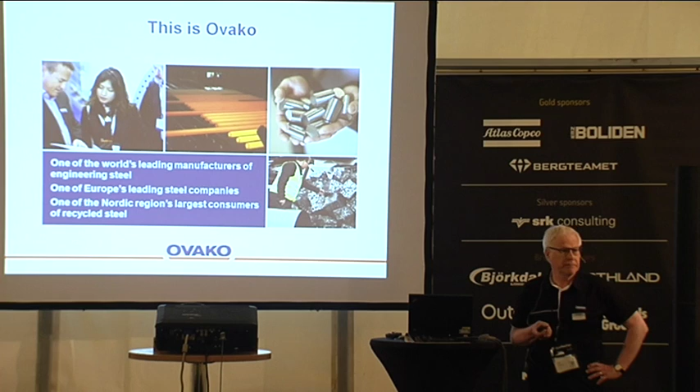Some words about our product palette. Most of the tonnage is produced as bars in different sizes and shapes. We also have profiles on the program. We do hot worked bars and cold worked bars. We also produce rings up to a size of 4 meters today.

Tubes, and of course what we'll be talking about today is the grinding media, as grinding balls, but also as grinding rods.

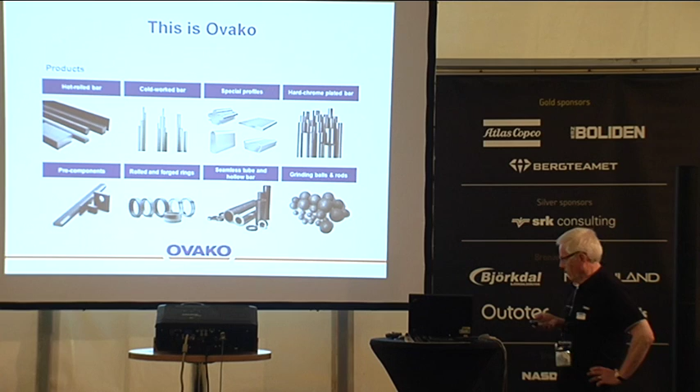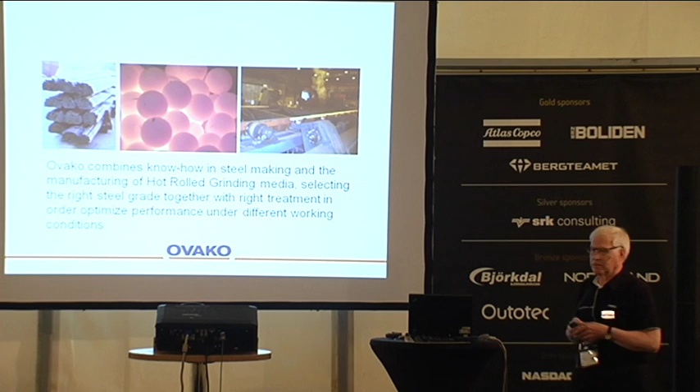What makes us special in this case is that we are probably one of the very few manufacturers of grinding media with their own steel mill production backing us up. From that we can choose the best optimized solution when it comes to steel making, forming, and treatment in order to optimize the performance under different working conditions during grinding.

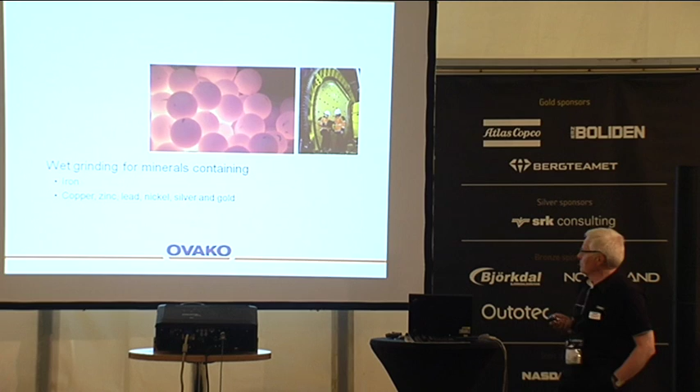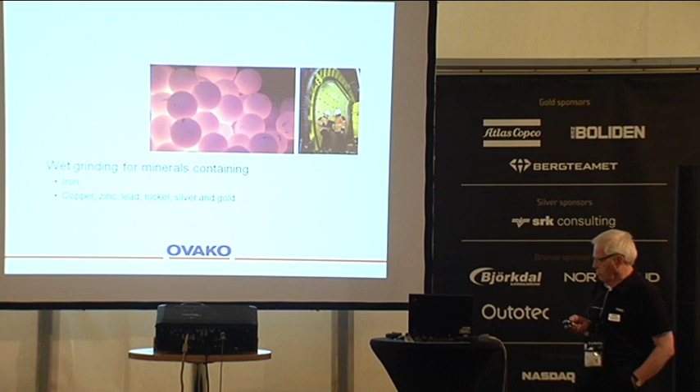Our focus area first hand is wet grinding, and it can be minerals containing iron, which is normally the oxidic mineral, copper, zinc, lead, silver and gold. It can also be grinding for the cement industry, mainly grinding sand and limestone, or it can be soft minerals like talc or graphite.

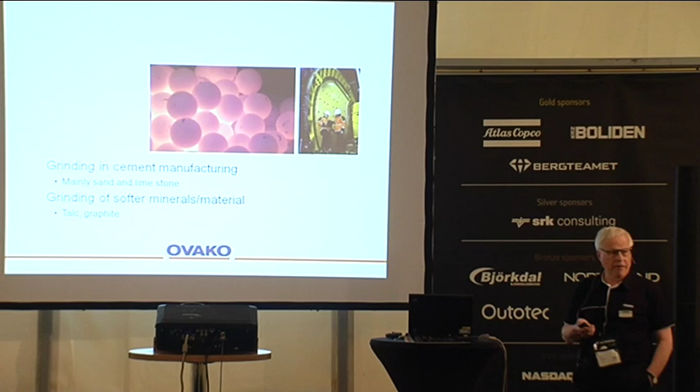We also supply for the recycling industry, which is in first hand taking care of slags from the metallurgical processes. It can also be glass that is recycled, or cemented carbide tools that are grinded.

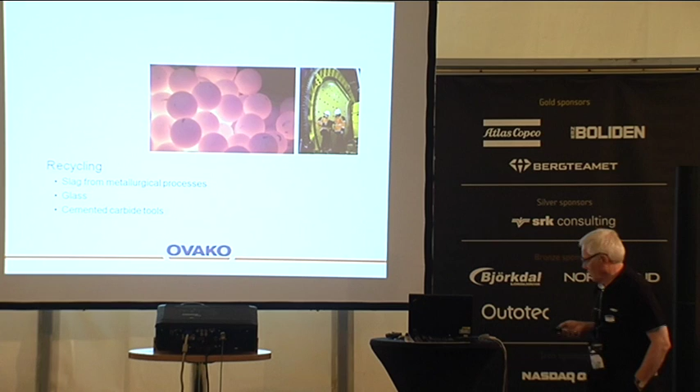In the grinding process, our customers are often focusing on the output, tons per hour, energy consumption, kilowatt hours per ton, or the wear of grinding media, grams per ton or grams per hour.

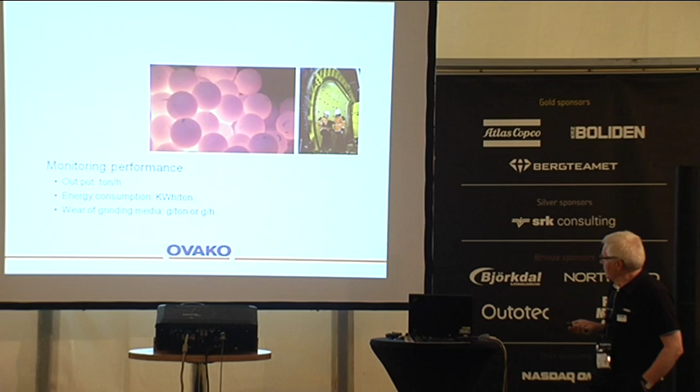For a given grinding ball or rod, the steel chemistry in combination with the microstructure are the dominant factors for controlling wear resistance.

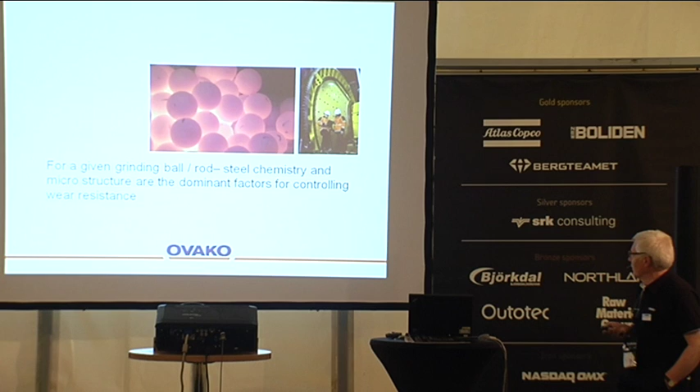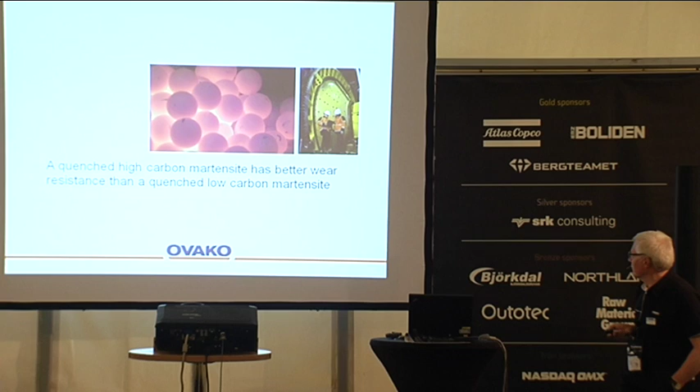A quenched high carbon martensite has better wear resistance than a low carbon martensite. Increasing hardness always leads to improved wear resistance, and that's the reason why we very much focus on alloys of steel with rather high carbon content.

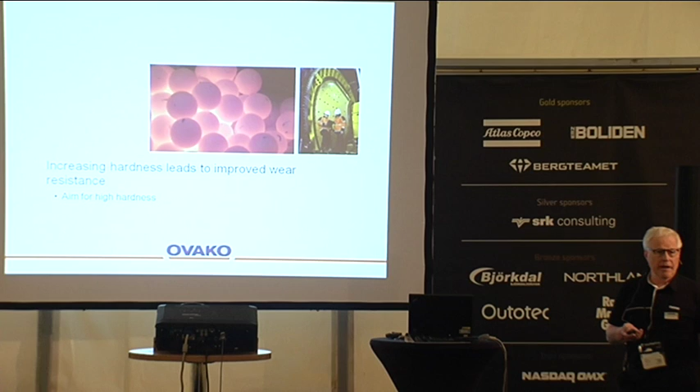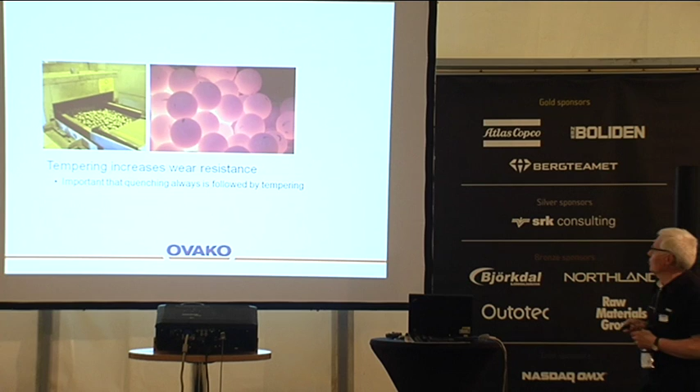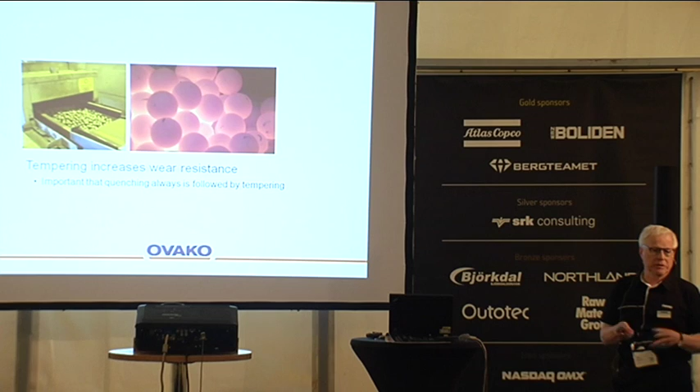Tempering always increases the wear resistance, so that means that after quenching, the grinding media need to be tempered in order to gain the best wear resistance.

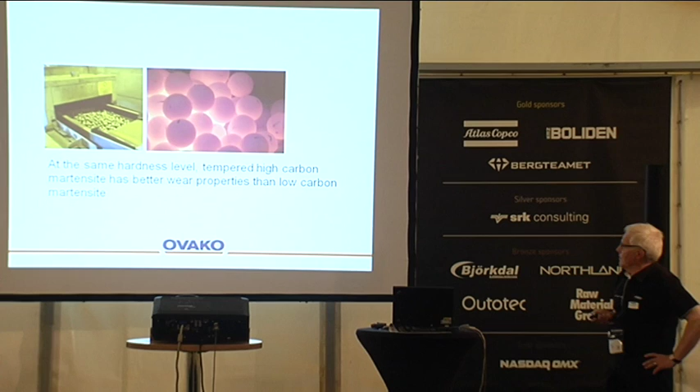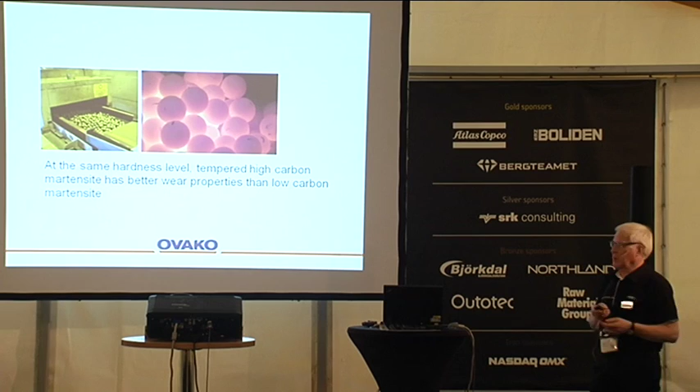And of course, under the same conditions after tempering, high carbon martensite has always proven to be better than low carbon martensite.

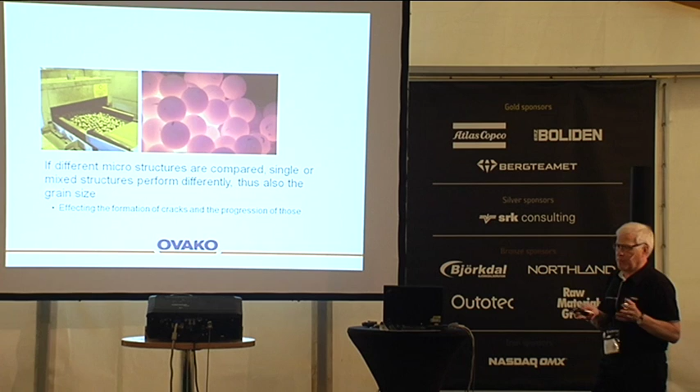If you have different kinds of structures, normally we try to focus on having the same kind of structure in the grinding media, as we can see it performs differently with a mixed structure. The grain size in the grinding media is also very important, especially when it comes to how the wear is progressing, and to avoid the formation and progression of cracks in the grinding media.

That means that sometimes a grinding media with a lower hardness can have better performance than one with a higher hardness, if you can control the conditions.

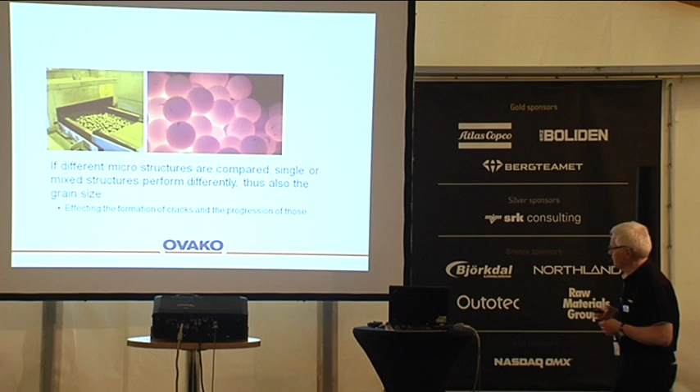So our message is that if you can control the conditions, have the same kind of steel with very small variations and the same kind of treatment of the steel, that means you can control and minimize the variations in your grinding operation.

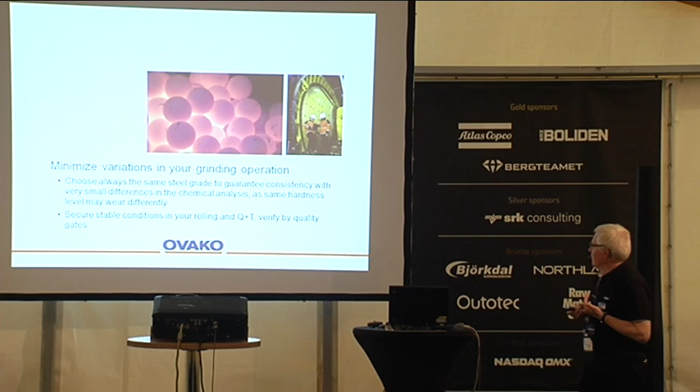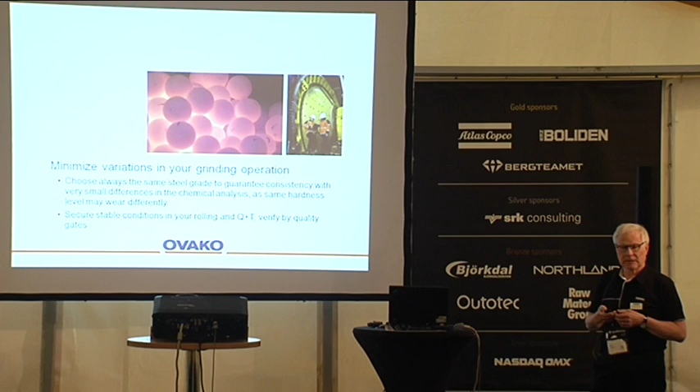And of course, for the manufacturer of grinding media, a number of quality gates are requested, so we can follow and monitor that our variations are as small as possible.

Choice of material, meaning selecting steel, is a very important part of the process in order to optimize the conditions in grinding.

We have today a number of standard grades that we are using on rods, around 1% in carbon. The next level, slightly softer, is 0.9, and then we have another at 0.8. So we can see different grades depending on what kind of minerals you are grinding.

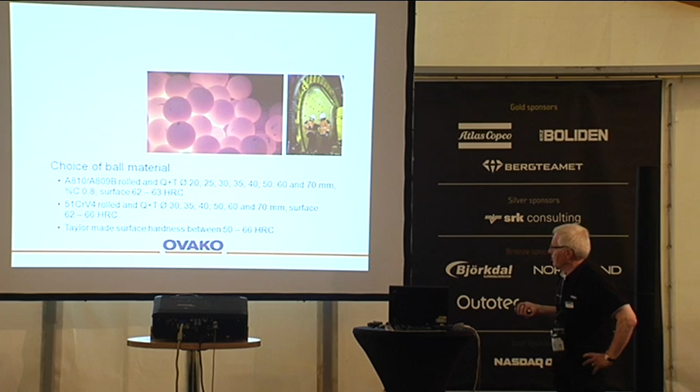But we can also, as a steel producer, offer a tailor-made solution. For the grinding balls, we are operating since some time with two different grades. One is where we control the grain size, grade B, operating with a carbon content of 0.8, a kind of eutectoid steel, where we can guarantee a surface hardness from around 62 to 63, which is more or less also the core hardness of the grinding ball.

We are also, for certain minerals, particularly in the cement industry, using the 51CrV4 grade, which can be offered in sizes from 30 millimeters up to 70 millimeters. We reach hardness levels of 62 to 66 Rockwell C, or we can define, if you have special requests on toughness, hardnesses between 50 and 66 Rockwell C.

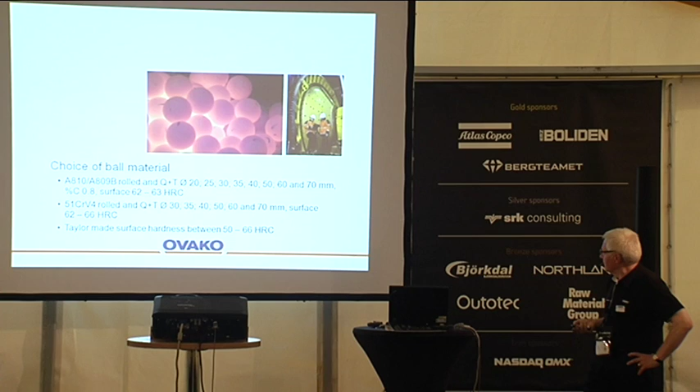Important in the grinding process, as we try to minimize the variations of the grinding media, it also helps to see variations in other factors related to grinding, which could be the lining in combination with the grinding media, or variations in the ore that is mined. It can also be affected by the speed of the mill or the levels of water, ore, and grinding media.

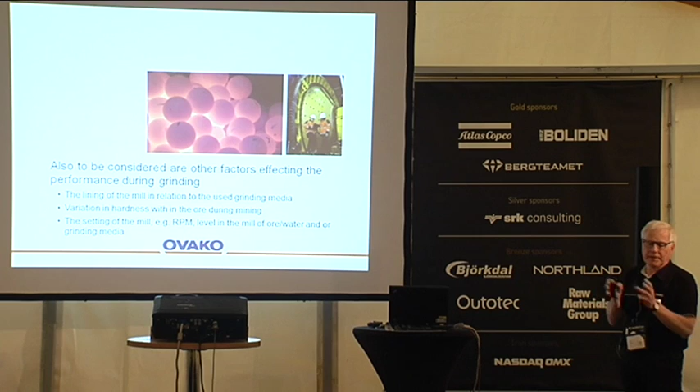So in order to focus on the variations that really affect the costs, it's important that we can have a grinding media that is very constant.

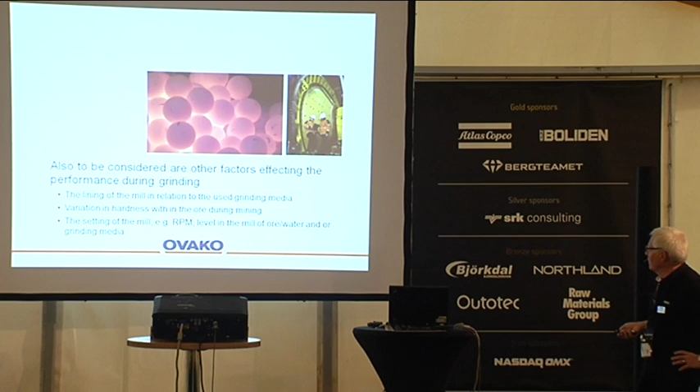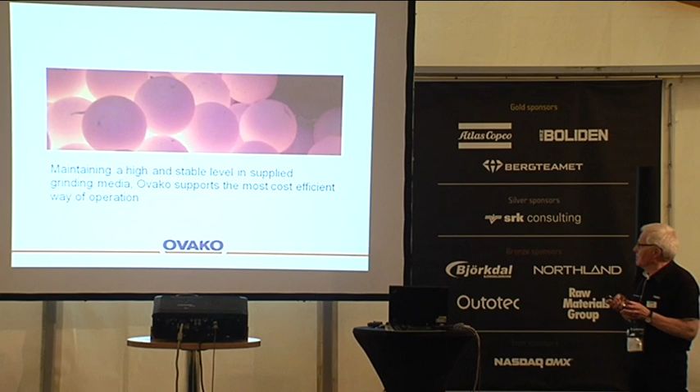So stable levels, or let me say, being able to maintain a high and stable level on the grinding media supplied into the grinding process, gives the best opportunities to have a good economy, which is the benefit of our customer.